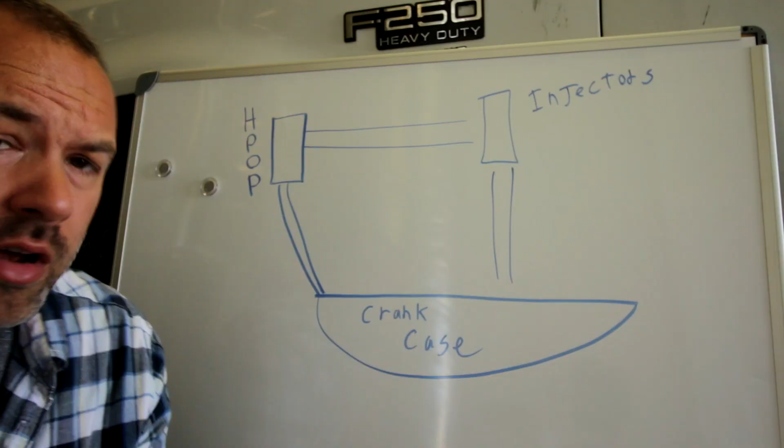It's going to be diesel because it's my 7.3 liter F250, and it's going to be extreme because we're going to be changing the oil in the crankcase, but also the high pressure oil pump reservoir. Let's get to it. Before we get started, let's go over what I'm talking about here and all the oil I'm going to be changing out.

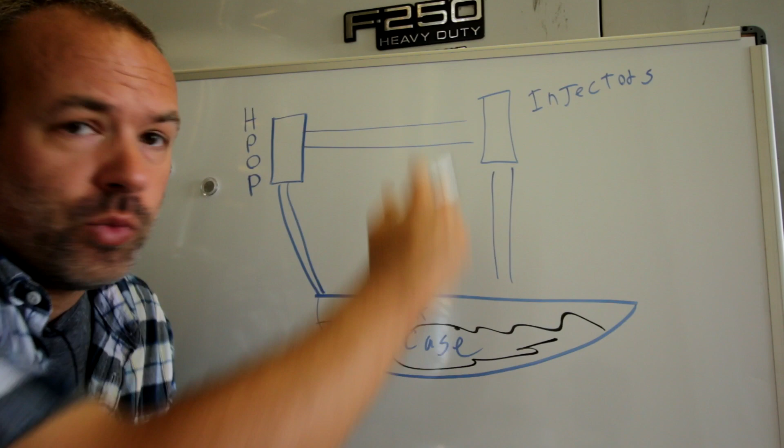First of all, the crankcase. That's where the majority of all the oil is going to be. So you have this layer of oil here that is all down here. That is where all the oil drips down from the engine and is stored. That's what we're going to drain. There's a little drain plug right here, and we're going to drain all that oil out of there.

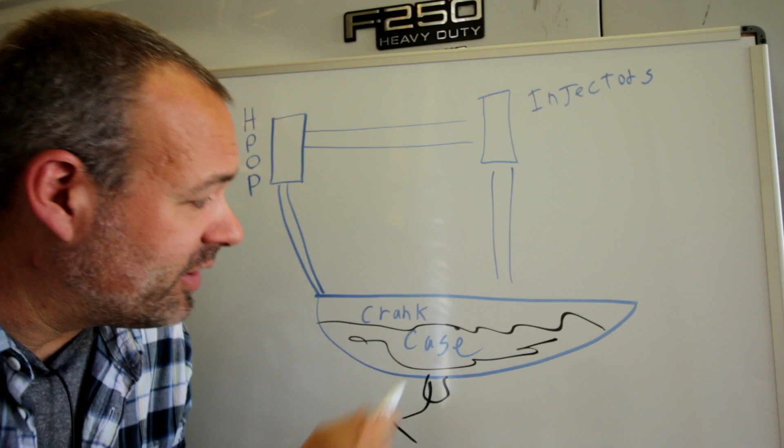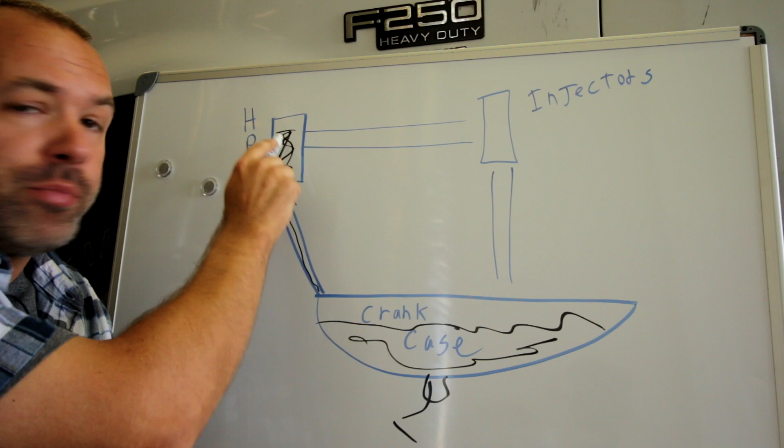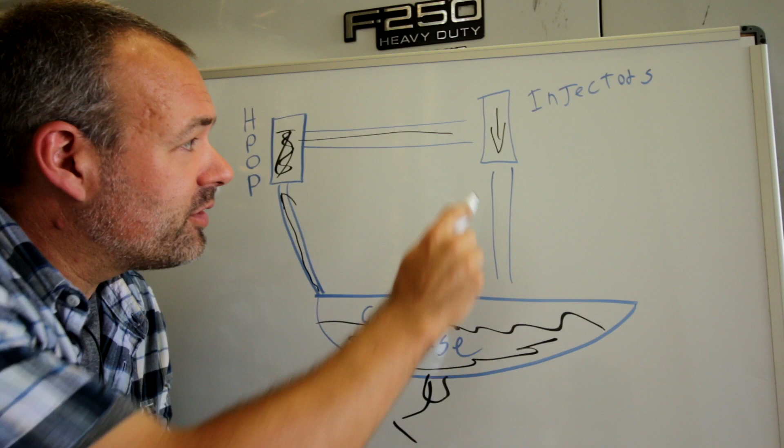And that's the majority of all the engine oil changes out there, you just change the oil that's in the crankcase. Well, in a diesel engine, especially the 7.3 liter diesel engine, some of that oil goes up here to the HPOP, which stands for high pressure oil pump. And what that does is it pressurizes engine oil, sends it across the engine, and is used to actuate the injectors. Now, in a perfect world, once the oil is used to actuate the injector, then it drips down back into the crankcase and is recycled, goes through the engine oil filter, and so on and so forth.

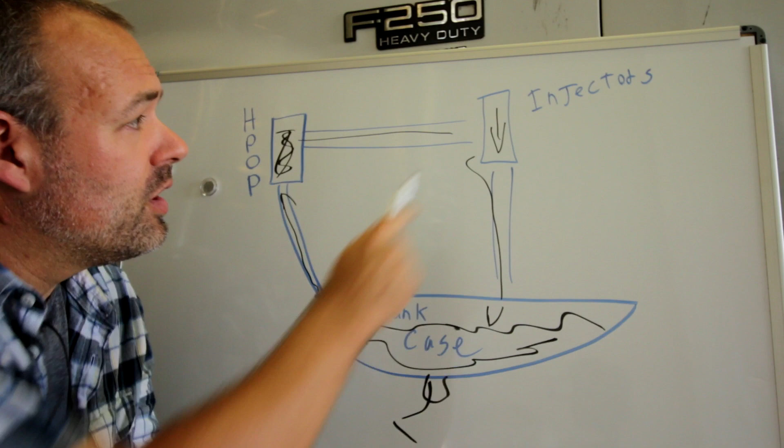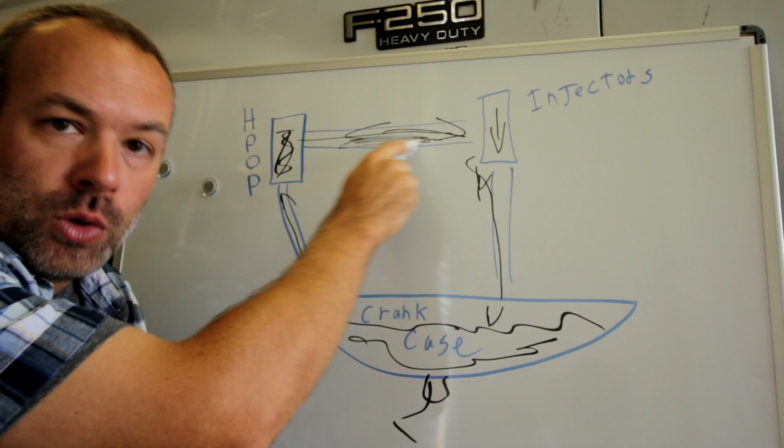Well, apparently, on occasion, this oil doesn't actually drip down there, or drips down very, very little, and the majority of it just keeps on going back and forth between the high pressure pump and the injector, getting older and older, turning more and more into sludge versus actual engine oil.

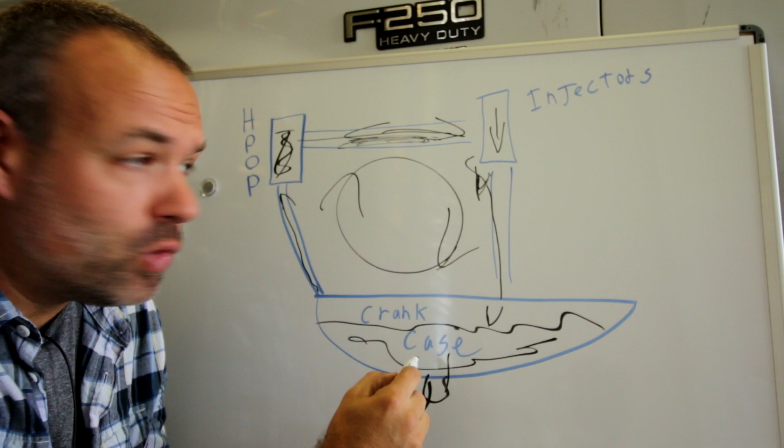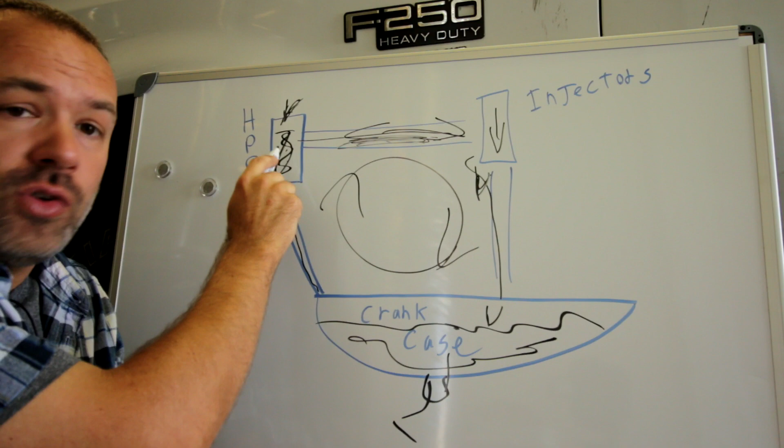So a lot of experts out there will tell you to change the crankcase engine oil, and there's an actual inspection plug on the top of the reservoir for the high pressure oil pump. And you can stick a tube down there and suck out all the oil in the reservoir here. So a lot of experts will tell you to change the oil here and here in a 7.3 liter diesel engine.

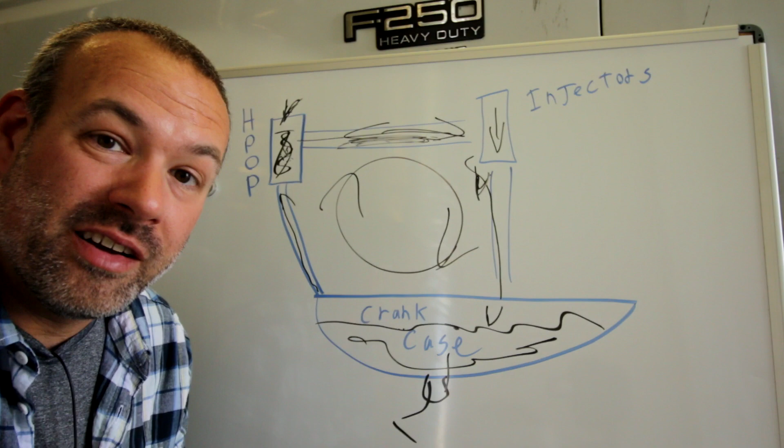Now this truck is a great test case for this issue because it has 200,000 miles on it, and I know for a fact, beyond a shadow of a doubt, that the oil in the high pressure oil pump reservoir has never been changed. So we're going to find out in 200,000 miles, is that an issue or not?

Now let's go ahead and drain the oil out of the crankcase. This particular engine and year uses a 3/4 inch socket, which I have installed on my 1/2 inch drive here. This is a 7.3 liter diesel engine on a 97 F250, so that may be completely different on your particular engine.

Now make sure your catch pan is large enough. The engine takes 15 quarts of oil, and I've got a 16 quart capacity catch pan here. Make sure you take out the air plug there and take out the stopper, lay that aside, don't lose it. And the oil's already been warmed up, so don't worry about that. There we go.

Alrighty, while that drains, let's go ahead and suck out all the oil out of the high pressure oil pump. First of all, we're going to...

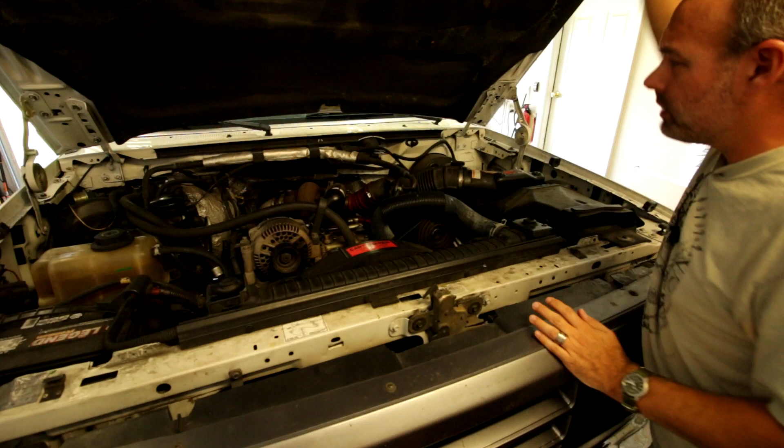Raise the hood, which takes a latch inside the cab, and right here, there she is in all her glory. Now I will be putting another camera back here so you can see it better, but the actual reservoir is right here. It's a big, huge thing. It holds about 1 quart from what I understand, so let's find out.

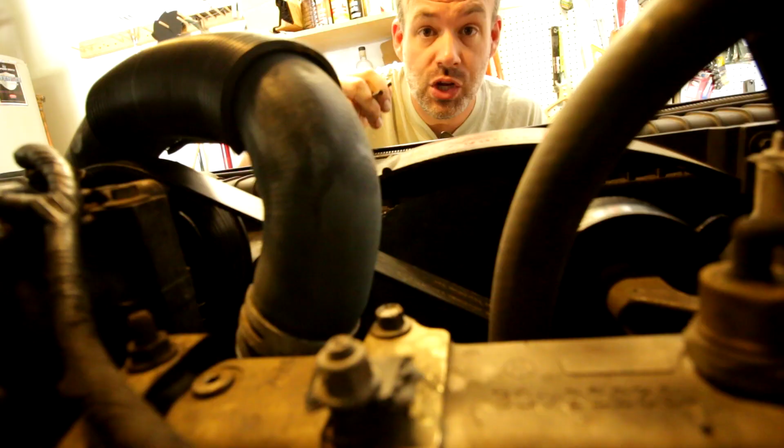You right now are sitting right on top of the fuel filter. Right here is the high pressure oil pump reservoir, and here is the plug. I'm going on the mirror image in the camera here, but there is the actual plug I need to take out to suck out that oil. So let's see if I can get that unlodged first.

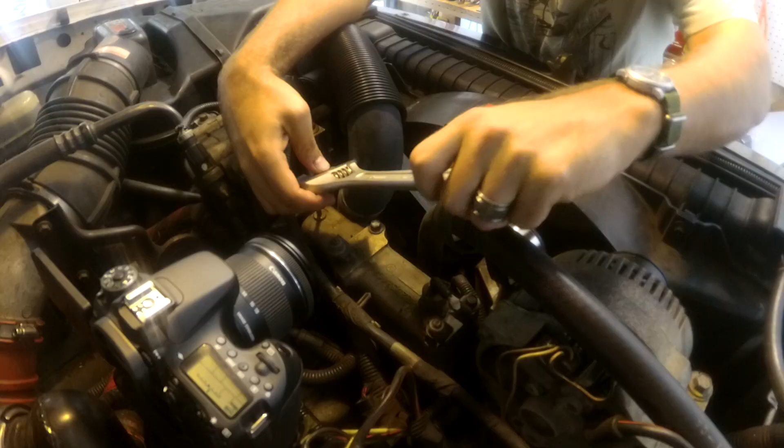I want to get this to move without hurting my camera gear. Oh, that's not budging. Oh, you can tell right now it has not moved since '96 when the engine was built.

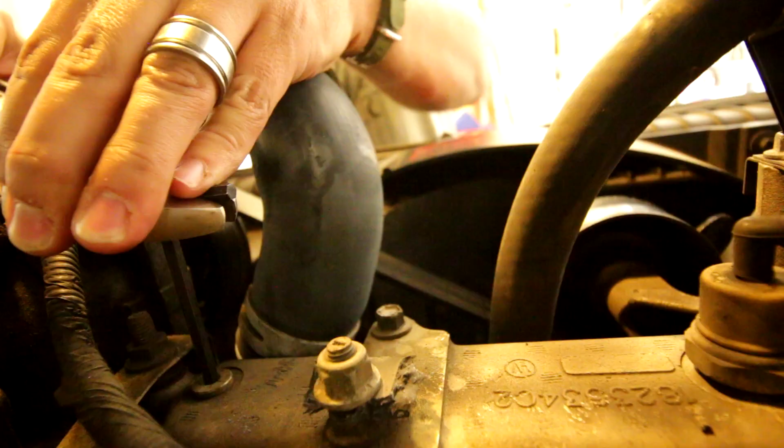I believe that broke free. Yep, it did. I did not break the actual Allen key.

Initial impression: the oil is on top of the plug here. Looks fine.

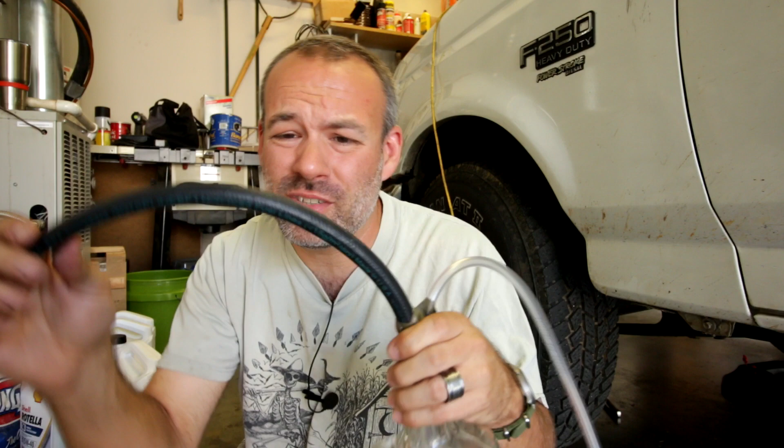And I duct taped both of those tubes into a George Dickel bottle.

Now if you're ever a guest at my house, you'll be offered a whiskey. And what whiskey I offer you will tell you what I think of your taste buds. If you're someone I'm pretty sure will be able to appreciate a fine whiskey, you will get a fine whiskey. If I think you won't appreciate a fine whiskey, you're gonna get yourself some George Dickel.

Now how this apparatus works: I have this vacuum tube right here, and I'm gonna plug it into my shop vac. That will create a vacuum, a catch basin, so it's not sucked into my shop vac. Then I'm gonna stick this down into the reservoir and suck it up into here. Hopefully that's gonna work.

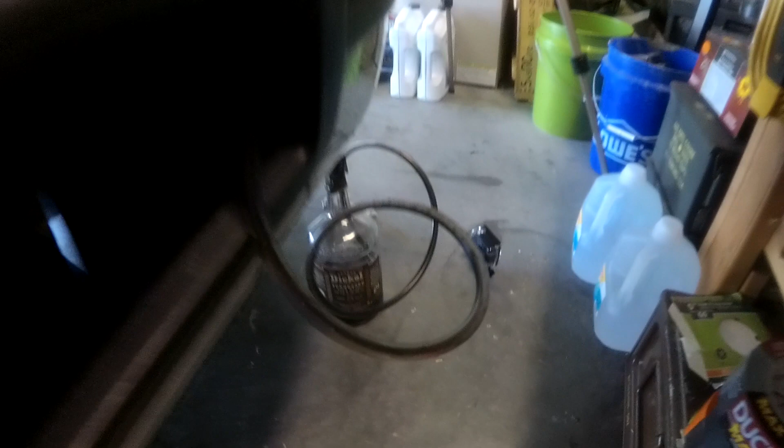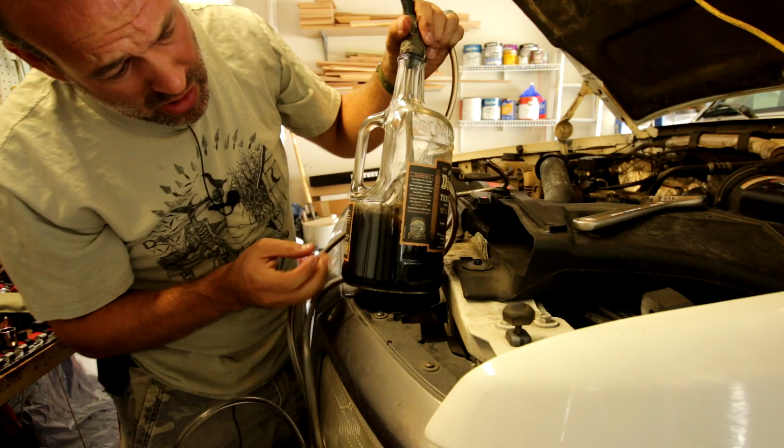Okay, here we go. That's what I pulled out of it there. And as you can see, getting a close up there, there's no sludge in that at all. It's just regular engine oil that's been used. Looks just fine to me. Now your mileage may vary, and I'd suggest doing this if you have a 7.3 just to check on it, but mine seems to be operating the way it was intended.

And now let's go ahead and continue on the rest of the oil change.

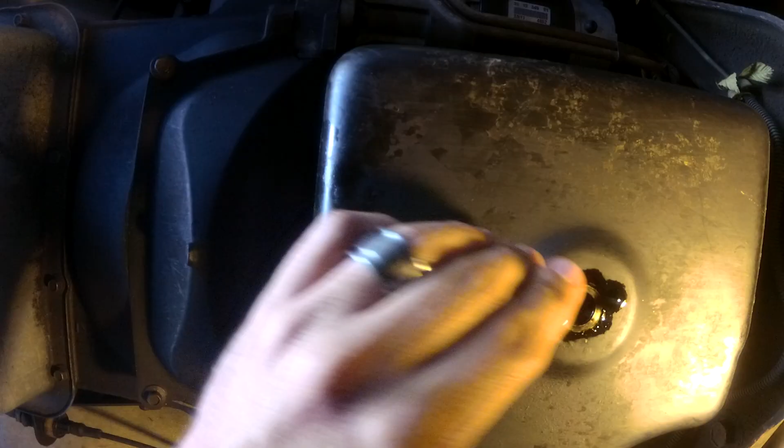Now put the drain plug back into the crankcase. Some people like to change out the washer, some don't care. I personally do not care. If I leak a little bit, it does not matter, I've got 15 quarts in there to play with.

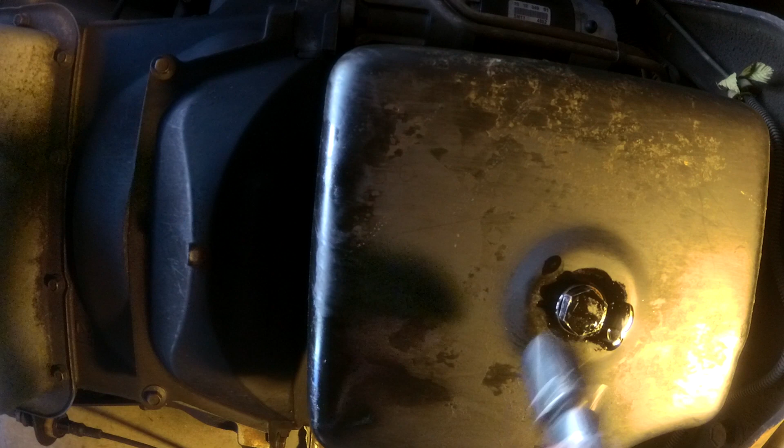I'm sure there are specific torque specs on here, usually it's 15 or 20 foot-pounds. Now for these oil filters, I like to use a strap wrench, and it works really, really well for these. You can get a size-specific strap wrench or oil wrench for these, but it really doesn't matter.

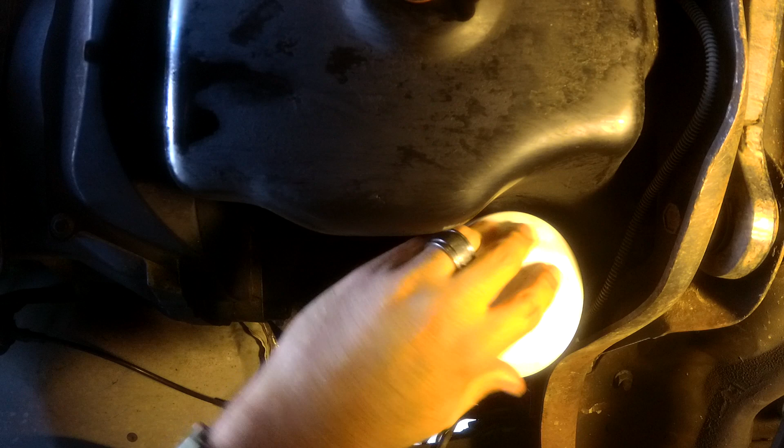Let that drain a little bit, and I'll take it the rest of the way off. Oh, there we go.

Let that drain. Yes, I probably really should have gloves on for this, but you know, I don't deal with oil every single day, should not be an issue. And I'll clean up pretty well later.

All the old oil has been drained out of the crankcase, the old filter is taken off and all that's drained out of there, and of course I've got the oil out of the high pressure reservoir. Now let's start to put everything back together.

I've already got the drain plug put into the crankcase. Here's a new filter here. I always recommend going with the filter recommended by the manufacturer. In this case, the FL1995, great big filter there.

Here we go. You want to make sure that the rubber O-ring is on there. Also, before I put this on there, I'll check to make sure that the rubber O-ring came off with the old filter and didn't get stuck up there.

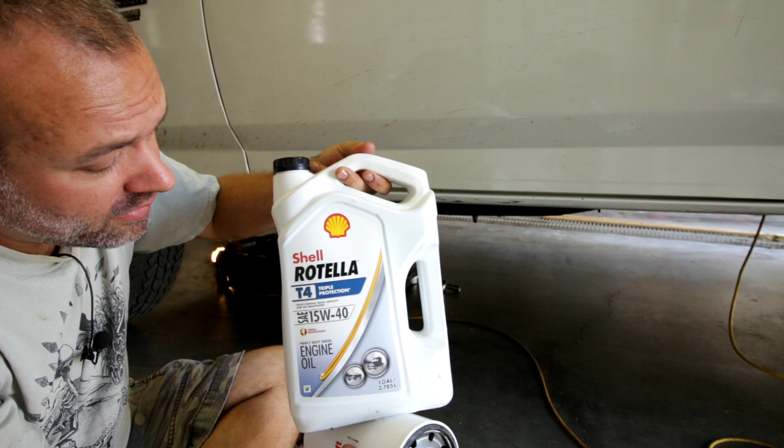As far as oil goes, I've got 4 gallons of Rotella 15W40 here, which is really, really good stuff. Ford makes their own Motorcraft version for this, and it's good as well. Pretty much all of it's the same now. As far as the weights are concerned, just get the proper weight and make sure it is a correct oil for the application, and you're good to go.

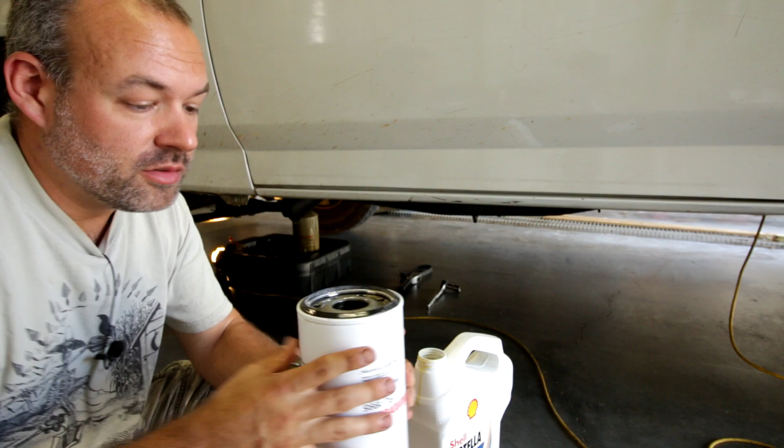This huge oil filter has a capacity of about a quart or so, and I go ahead and fill it up so it minimizes the dry start, which would be the engine running without oil before it pumped through here. So you want to make sure this is all filled up with oil. It's also good right now, I've got some oil right here, so I'm going to rub that onto the O-ring to make sure the O-ring gets nicely sealed to the engine.

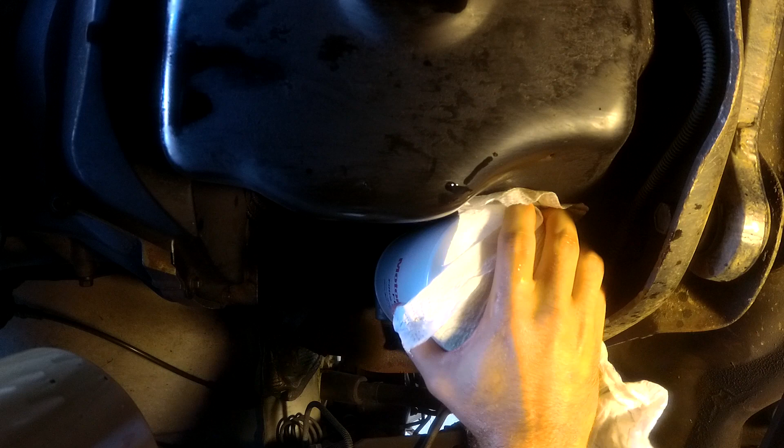There we go, she started. Paper towel here, make sure I get a good purchase on there to really get it cranked on and sealed. Now we've got everything sealed up.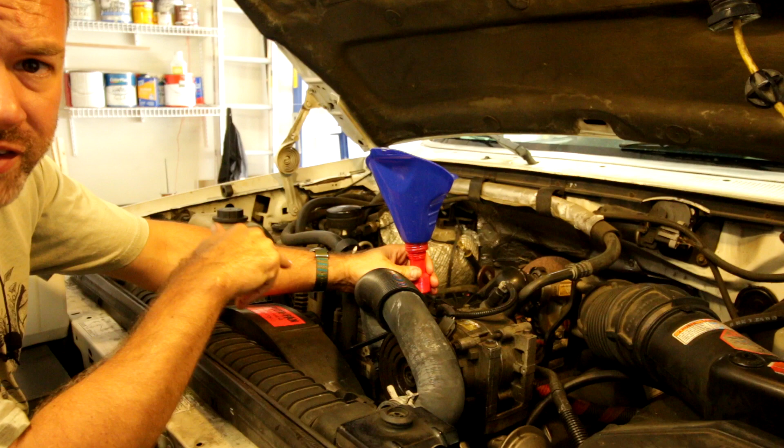Now one thing about F-250s is the fact you've got to have a stair step or something to get on top of these things. Yep, that sucker's full.

Now time to go ahead and put the plug in there. That's with the Allen wrench, a 3/16 Allen wrench. The thing about these F-250s, especially with the diesel engine, is about half the truck is metric, the other half is not.

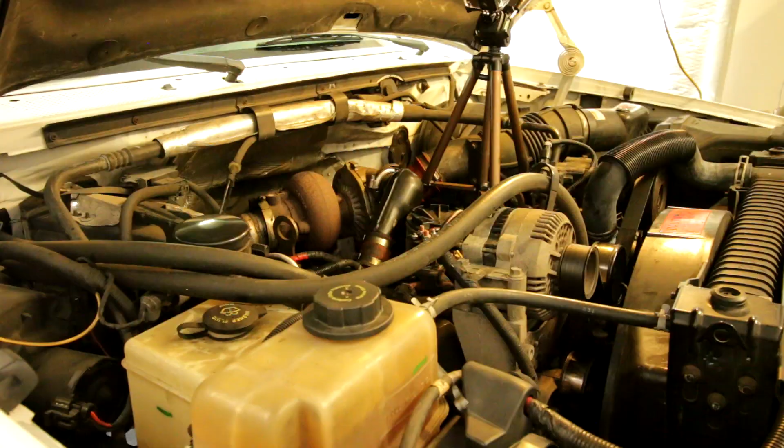Now it's time to add oil to the engine crankcase. So I've got this old funnel here, and my dad taught me to always stuff a rag down inside that funnel. That'll make sure the inside of the funnel is relatively clean, because you don't want to pour a bunch of garbage through a funnel and into your engine. And here we go.

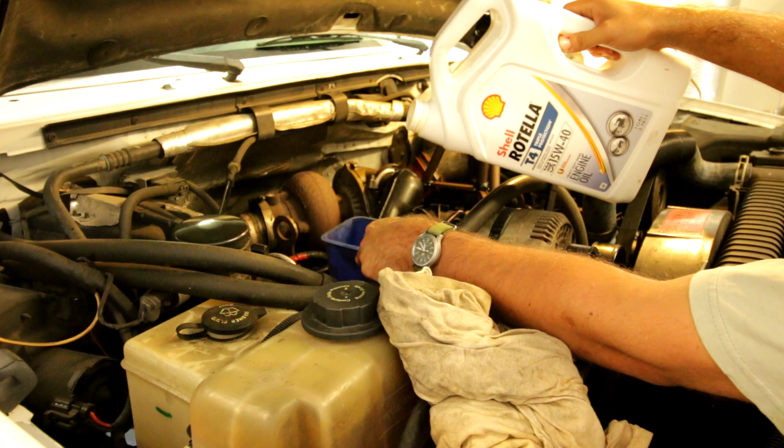Put the cap right back on, and I'm going to secure that in the back somewhere where it will drain and collect at the spout.

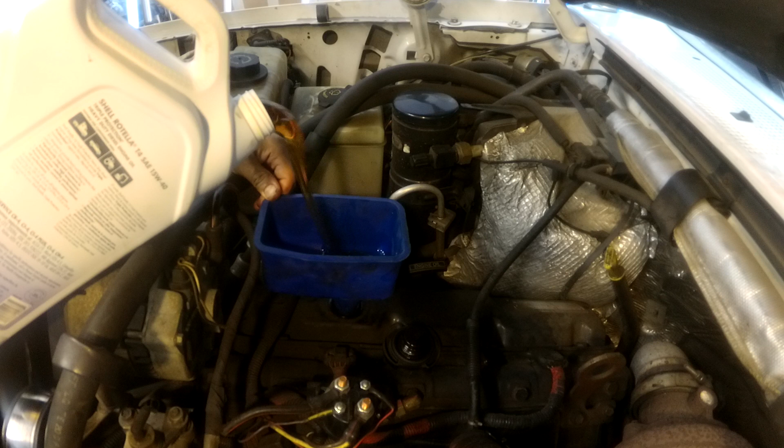Now I'm going to pour the next gallon. The 7.3 liter engine uses 15 quarts of oil, and I've got 4 gallons here, which is 16 quarts. I've always just put the total 16 quarts in it, and I've never had an issue. So it's just as easy to throw 4 gallons in there and leave it.

Also, if you do drain the high pressure pump reservoir, make sure you put that cap back on, because it will shoot oil out like a fountain.

Okay, I'm going to let that one drain here. Here's the first gallon of oil that I had draining. So I cracked this right here open, and I'll get another bunch of oil come out.

Look at that. Now the thinner oils, you don't have this much of an issue, it drains pretty quickly. But this thicker diesel oil will stick inside for a while. You've got to really drain it quite some time to get the entire amount out. Oil filler cap back in place, and now we're going to start her up and check for leaks.

So I have to say, the extreme part of my diesel oil change today, I don't think it was necessary. I personally do not think it was very necessary, because the oil that I got out of the high pressure oil pump reservoir was exactly the same as what I drained out of the crankcase. So everything's working normally as far as my engine is concerned. That does not mean everything will act normally in your 7.3 liter engine, because I've seen video of people pumping out just pure sludge out of that. Now I don't know what situation causes that, but obviously I do not have that problem in my truck.